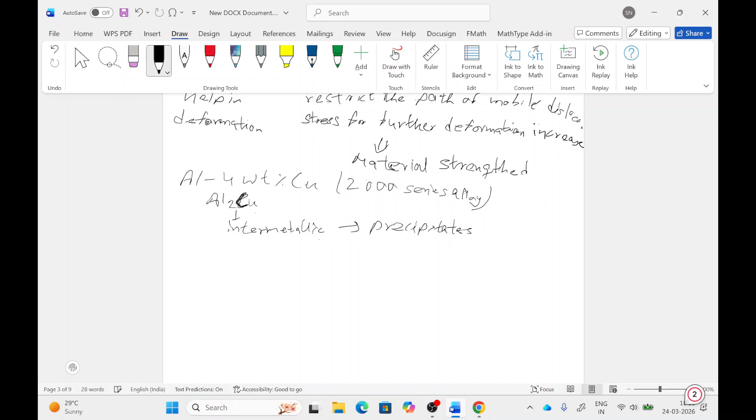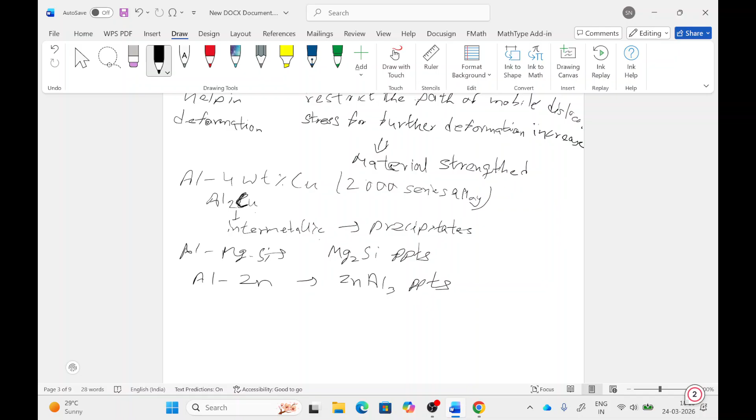Similarly, for the aluminum magnesium alloy and aluminum magnesium silicon alloy, there are Mg2Si intermetallic precipitates. With aluminum zinc also they form ZnAl3 precipitates. So intermetallics are called precipitates, and if oxides and carbides are forming,

carbides are called dispersoids. So dispersoids and precipitates differ from each other. The dispersoids are like tungsten carbide, molybdenum carbide, vanadium carbide, and Al2O3. When these particles form, they are stable at high temperature.

At high temperature they are stable, so they can still provide dispersion strengthening, meaning they maintain the strength of the material at high temperature. But if we talk about precipitates, they dissolve at high temperature, so their strength is only increased for a specific service temperature regime. So precipitates have a service temperature region where the strength is higher, but dispersoids are stable at high temperature, so they provide more strengthening in the metal.

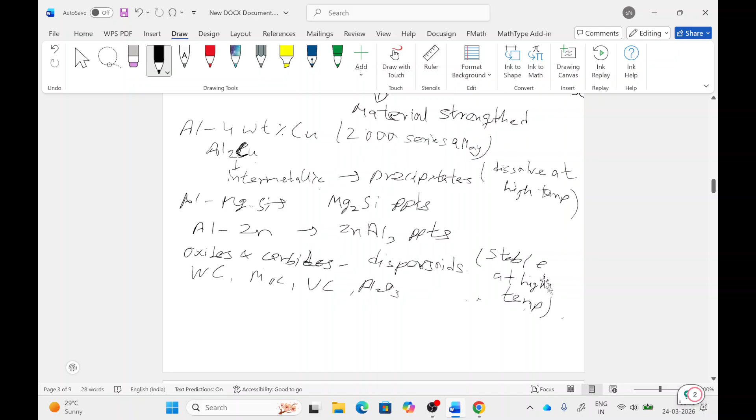So precipitation strengthening occurs. I will explain it here. Precipitation strengthening can be understood by the phase diagram. So if we draw the phase diagram of temperature versus weight percent of copper,

this is the solidus line, this is the liquidus line. Here it is liquid, here it is liquid plus solid, and here it is solid.

We can see that at this point the concentration is let's say C1. If we move along this line, with decreasing temperature, if we mark a point, we can see the concentration of copper is also decreasing in the aluminum. This is the

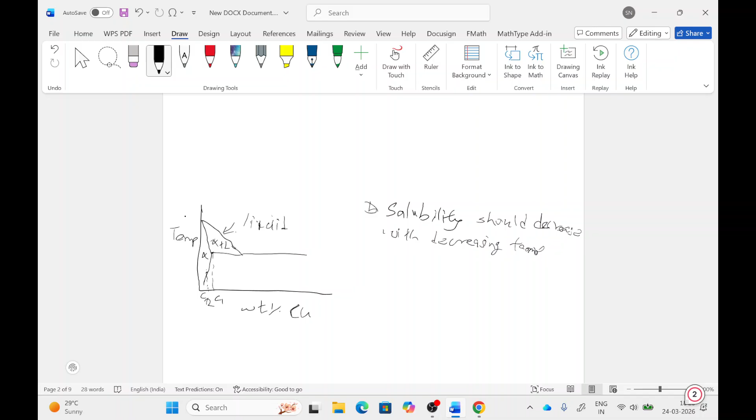In this aluminum copper system, generally the precipitates are formed using a specific method. First, we solutionize our alloy to a temperature. This is 660 degrees Celsius, and this is around 500 to 400. Generally, we heat the material to form a single solid solution where the concentration of copper is higher, let's say at T1.

So we heat the material first, heating to T1, to make a single solid solution, meaning the copper and aluminum — all copper atoms are solutionized in the aluminum matrix.

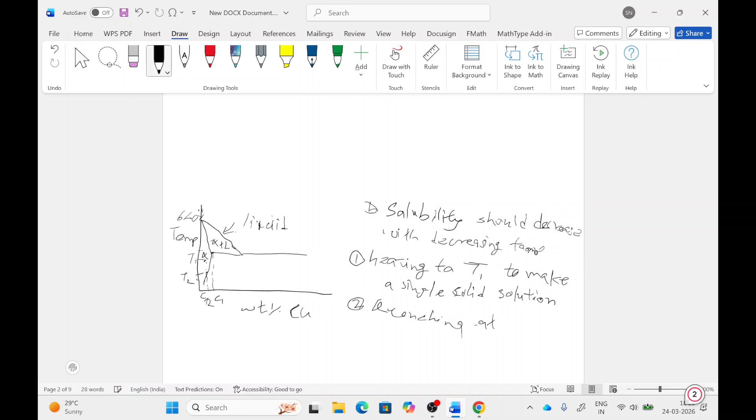So first is the heating, second we quench the sample to room temperature or a lower temperature, let's say T2 — quenching at low temperature. When we quench this alloy, all the copper will remain in the aluminum matrix, meaning quenching is rapid cooling.

In slow cooling, the copper will segregate from the aluminum matrix, but when we do quenching, there is rapid cooling, which helps in keeping the copper atoms in the aluminum matrix. So that solid solution is called a supersaturated solid solution.

After that, if we heat the sample to a slightly higher temperature than T2, heating at a very low temperature, it can be at 100 to 150 degrees Celsius or room temperature. Depending on the temperature given, with time it remains a supersaturated solution.

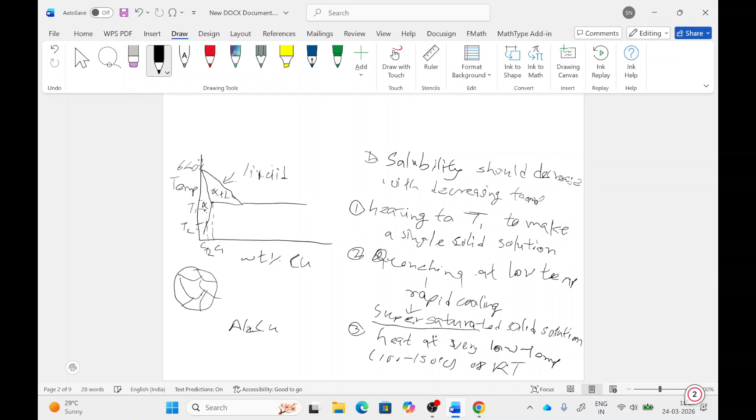When we keep the material for a long period at low temperature or room temperature, small precipitate particles will form in the grains and at the grain boundary also. These tiny particles form with time in the aluminum copper system, and they interact with dislocations, increasing the strength of the material.

Al2Cu precipitate, and the white space is the alpha solid solution with a decreased amount of copper.

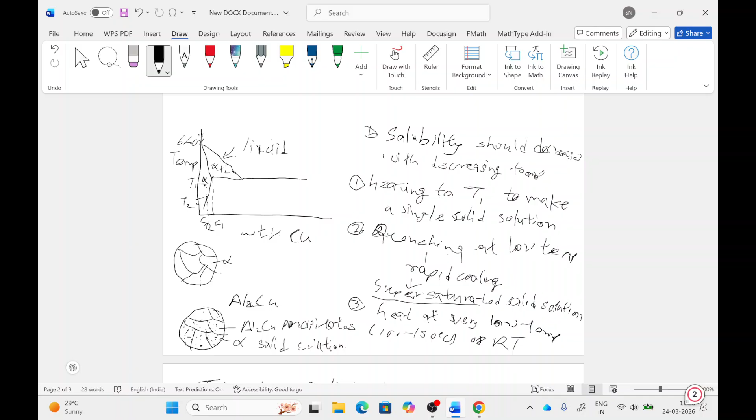So there is one phenomena also. With increasing the precipitate size, the strengthening mechanism also differs. The small precipitate can be sheared or cut by dislocations.

So in this condition, when precipitates are small and dislocation can cut them easily, the strength is directly proportional to square root of the precipitate size.

If precipitates increase in size with time, the large precipitates become strong, so the dislocation cannot cut those large precipitates. Then the dislocations bow around the precipitate and then surpass it. So in that condition the shear stress will be proportional to inverse of the precipitate size.

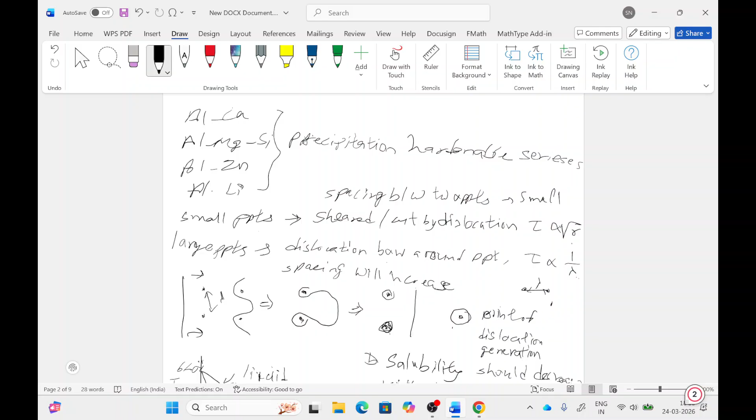So these, and one more thing, aluminum and copper - these are the precipitation hardenable series. And the remaining series, like aluminum magnesium, aluminum manganese, they are strain hardenable, like simple pure aluminum, aluminum manganese - these are strain hardened.

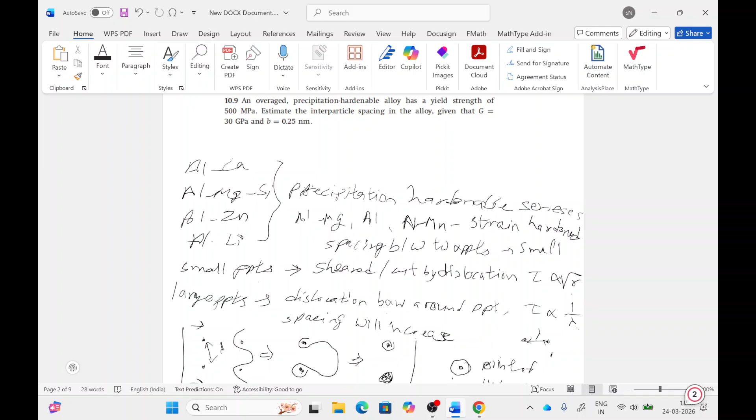So depending on the material or alloy, the strengthening mechanism will differ. In small precipitates, it is size of the precipitate, R. So with small precipitate, the particle size dominates, while in the large precipitates, the distance between precipitate dominates in strengthening.

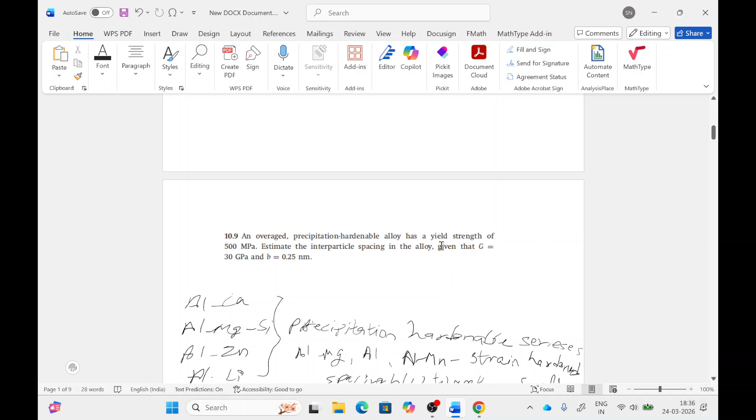So we'll discuss the questions. In this question, we have asked: consider a precipitation strengthened aluminum alloy. After an appropriate heat treatment, the microstructure of the alloy consists of precipitates with a mean spacing of 0.2 micron. Compute the shear stress required for bowing of dislocation in this material.

So we have given spacing between precipitates. Lambda is 0.2 micrometer, and it is aluminum alloy. So we have asked to calculate the shear stress. So shear stress can be written as GB by lambda.

So the shear modulus for aluminum alloy is 72 GPa, and Burgers vector is generally 0.286 nanometer. So when we put these values in, we get G is 72 into 10 raised to power 9 Pascal, into 0.286 into 10 raised to power minus 9, divided by lambda which is 0.2 into 10 raised to power minus 6 meter.

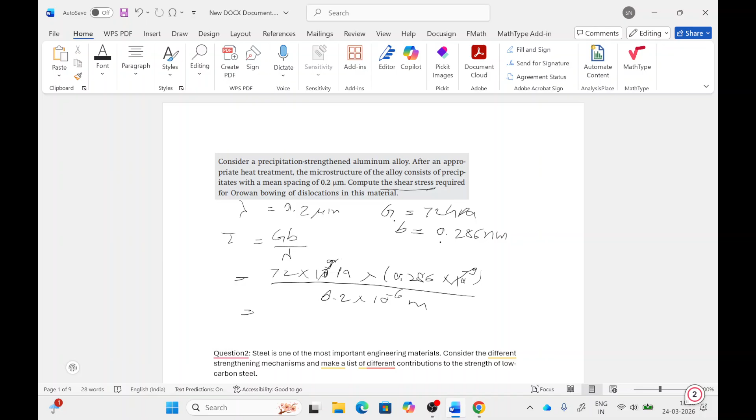So this will get cancelled out, and that will give... sorry, here G is the shear modulus, not the elastic modulus. So G is shear modulus.

So for aluminum, it is 30 GPa, or 27 also there. So elastic modulus is 72 GPa for aluminum and shear modulus is 30 GPa. So when we put 30 here, that will result in 42.42 into 10 raised to power 6 Pascal, that will be 42.42 megapascal.

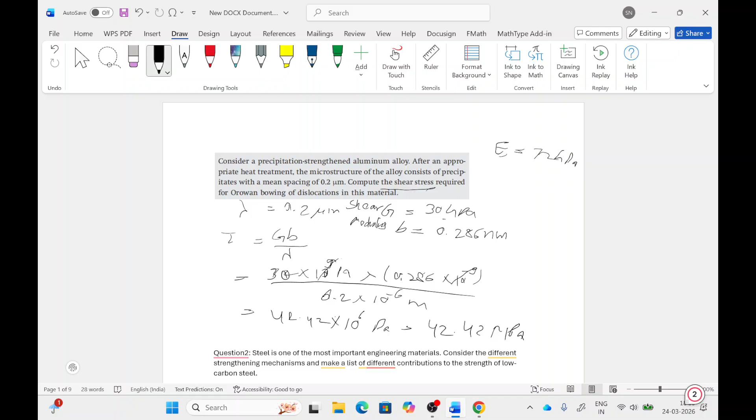Next question we will solve. It is a theory-based question. We discussed that different materials will have different types of strengthening mechanism, so in steel also we have a strengthening mechanism which results in increasing the strength. Steel is one of the most important engineering materials. Consider the different strengthening mechanisms and make a list of different contributions to the strength of low carbon steel.

So in the low carbon steel, it is iron and carbon, but some other trace elements can also be there, like magnesium, silicon, tungsten, chromium, vanadium, in very small amounts. These all can form carbides with carbon, and with contact with oxygen they can form oxides also.

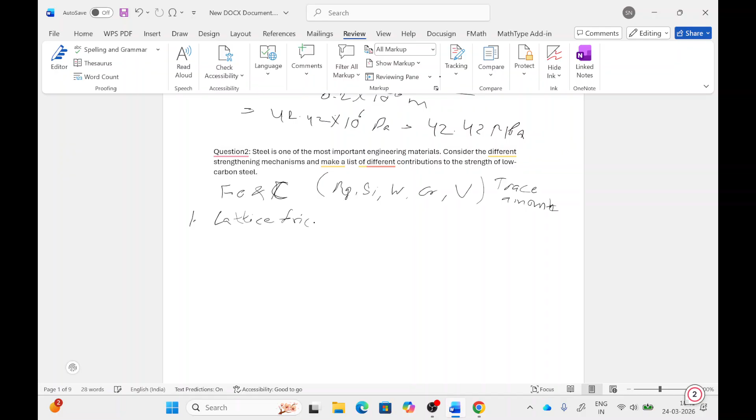So there are dispersoids. So the first contribution in steel is the lattice friction stress. This is the compulsory strengthening in any material if we don't have any dislocation or any other feature - lattice friction will always be there. So we can say it is Peierls-Nabarro stress. Second strengthening is the solid solution strengthening.

It is written as sigma equals k root C, where C is the concentration of solute, meaning the carbon percentage, and K is some constant. So depending on the carbon concentration and other elements that influence strengthening by their presence, this also results in solid solution strengthening.

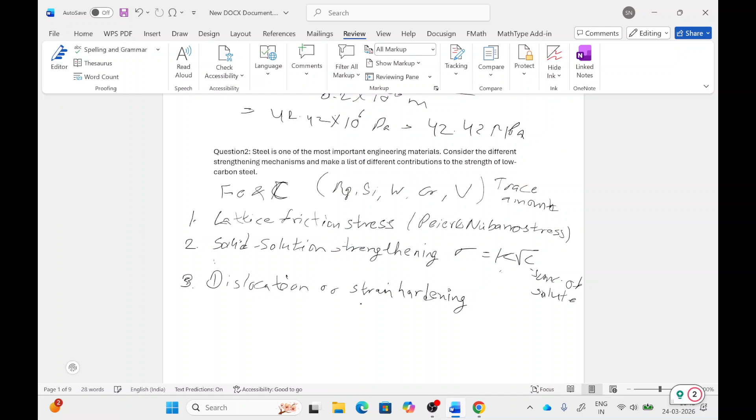Third point is dislocation or strain hardening. If we provide some deformation to the steel, that deformation increases the dislocation density, and that dislocation density increases the strength of the material. The stress is given as sigma proportional to alpha GB square root of rho, where alpha is some constant, G is shear modulus, B is Burgers vector, and rho is the dislocation density.

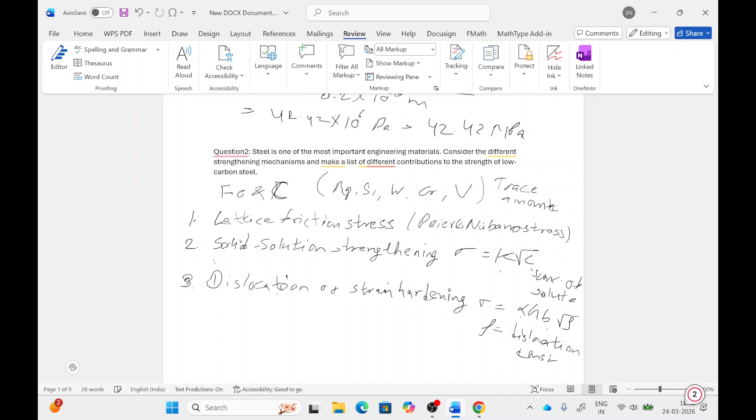Next is grain size strengthening. The grain boundaries also restrict the dislocation path, which results in strengthening. It is given as sigma equals K by root D, where D is the grain size. With increasing grain size, the strengthening will be low, and with a finer grain size, it will result in more strength.

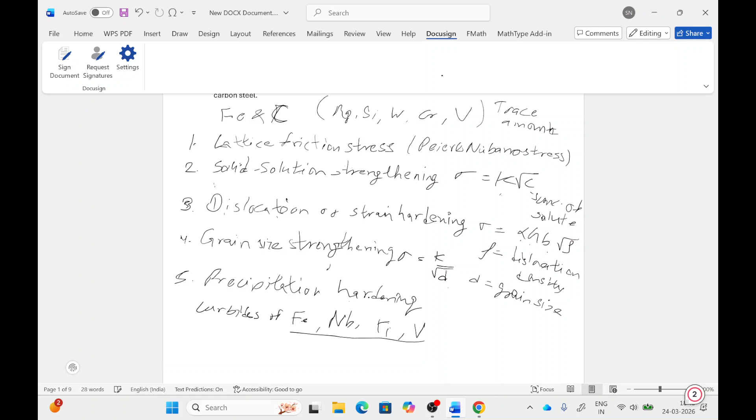Fifth contribution is from precipitation hardening. Precipitation hardening in a steel results from the carbides of iron, niobium, titanium, and vanadium. The carbides forming from these elements result in precipitation hardening or dispersion hardening also.

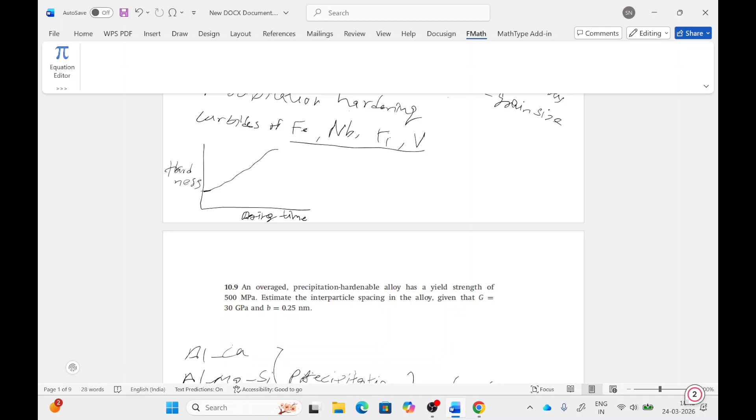Next question is on overaging in precipitation hardening. Overaging means if we draw a curve between hardness and aging time, we have some small amount of hardness in the material initially. The hardness increases with aging time and achieves a maximum hardness at a certain aging time, called the peak aged condition. In the peak aged condition, the hardness is maximum. The stage before this is called underaged, and the stage after peak aging is called overaging.

In this question, we are asked: an overaged precipitation hardenable alloy has a yield strength of 500 MPa. Estimate the interparticle spacing in the alloy, given shear modulus 30 GPa and Burgers vector 0.25 nanometer. So we have yield strength of 500 MPa, meaning the normal strength, and the shear strength of this alloy will be half of the yield strength.

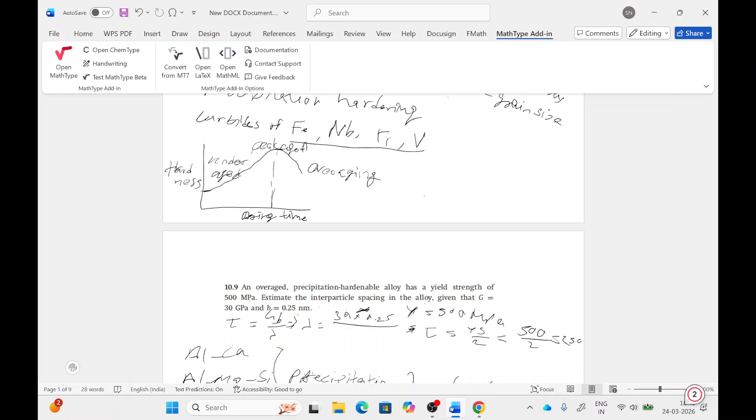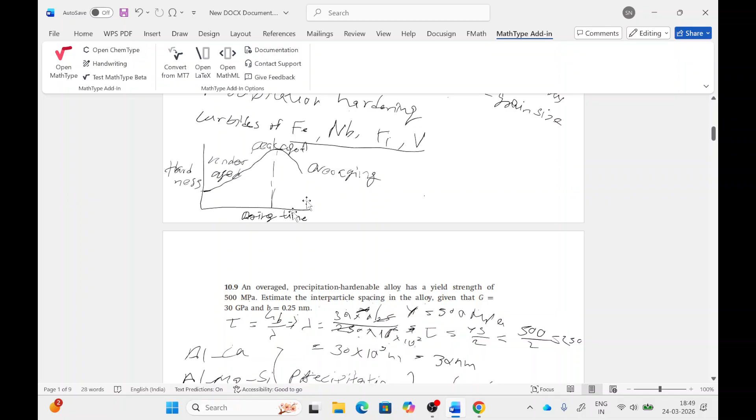Okay. Now, a numerical on the Peierls stress and the energy curve. Peierls Nabarro stress is the lattice friction stress.

We have an atomic arrangement like this. When the top layer of atoms moves in this direction, the atom has to move to a new position. The energy curve shows energy increasing as it comes to this point, reaching a maximum when the atom moves to this position, then decreasing again when it reaches the next stable position. When it comes here, the position is the same as previously, with no stress.

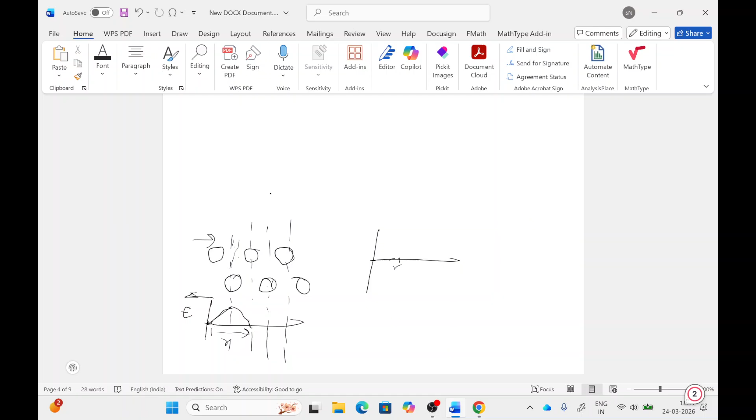When we plot force for this same range, this would be R by 2, and this is R. So the energy curve gets divided into four parts. At this quarter position, the force is maximum, and it decreases as it reaches this point, becoming very low at this position, and the force becomes zero again when it reaches this point.

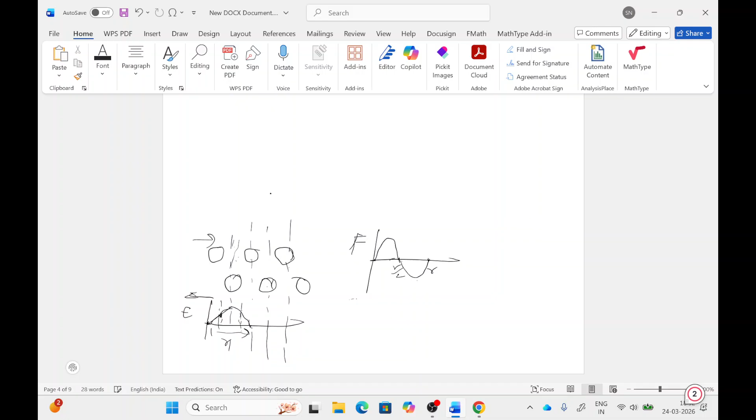So we can write force as shear stress tau, directly proportional to sine of this r. If we calculate it, there's some derivation involved, and the energy curve follows this pattern. This gives the Peierls stress formula: tau Pn equals 2G divided by 1 minus nu, times exponential of minus 2 pi w divided by b.

So G is shear modulus, nu is Poisson's ratio, b is Burgers vector, and W is the width of the dislocation.

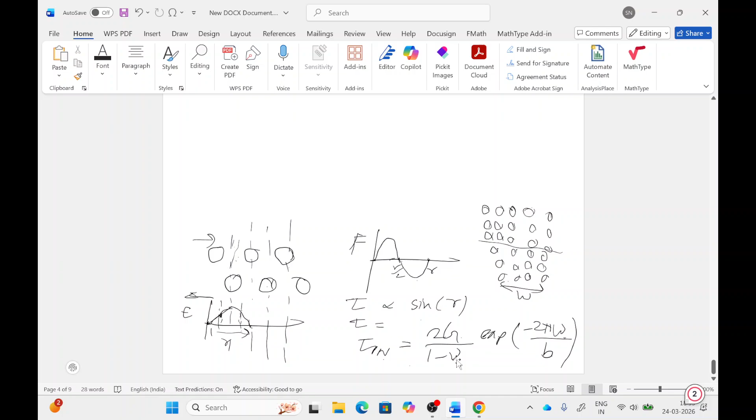Okay, so we'll discuss the assignment questions now.

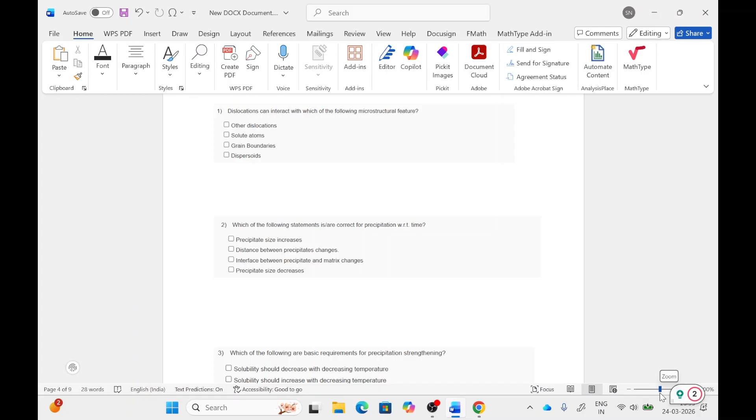First question asks: dislocation can interact with which of the following microstructural features? We discussed in the strengthening mechanism which features are responsible for dislocation interaction. All of the above, yes.

Next question: which of the following statements are correct for precipitation with respect to time? So options 1 and 2 - precipitate size increases and distance between precipitates changes.

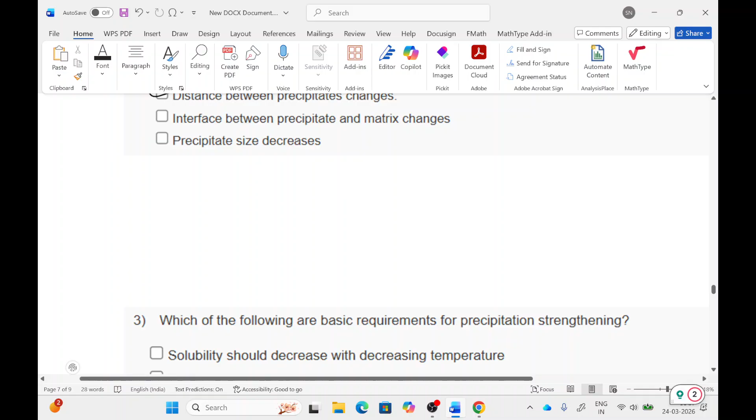Third question is, which of the following are basic requirements for precipitation strengthening? We had discussed in the phase diagram that solubility decreases when we decrease the temperature. So the first option is correct - solubility should decrease with decreasing temperature - and the second is wrong.

Formation of supersaturated solid solution - this is also required. And presence of a single phase region at high temperature - this is also correct.

Okay, next question - fourth question is,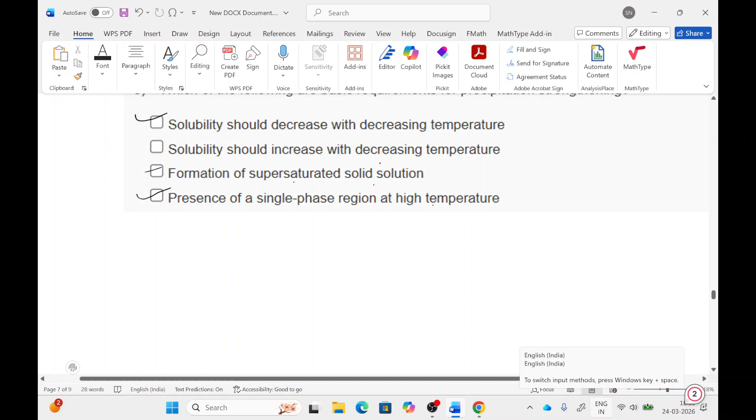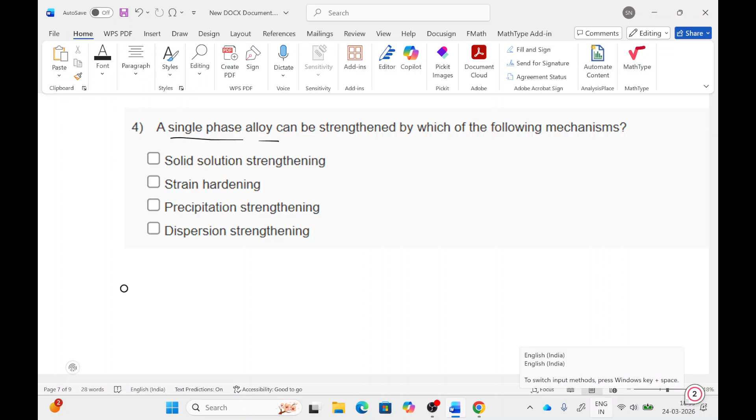a single phase alloy can be strengthened by which of the following mechanisms? Single phase alloy means there will be no precipitate or dispersoids. So other than dispersoid and precipitation strengthening, what can be the mechanism? There are two options remaining: solid solution strengthening and strain hardening.

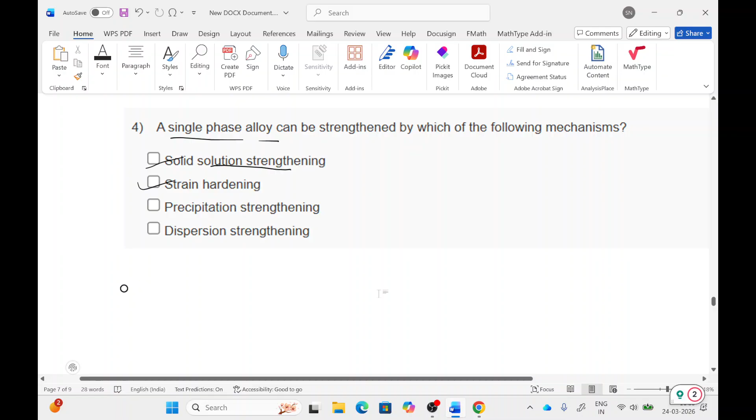Okay, next question is: which of the following conditions favor dislocation cutting of precipitate? So when dislocation cuts the precipitates - yeah, one more thing I have to tell.

With increasing size of the precipitate, the interface also changes. For small particles, the interface between the aluminum matrix and precipitate is coherent. Coherent means atom to atom matching.

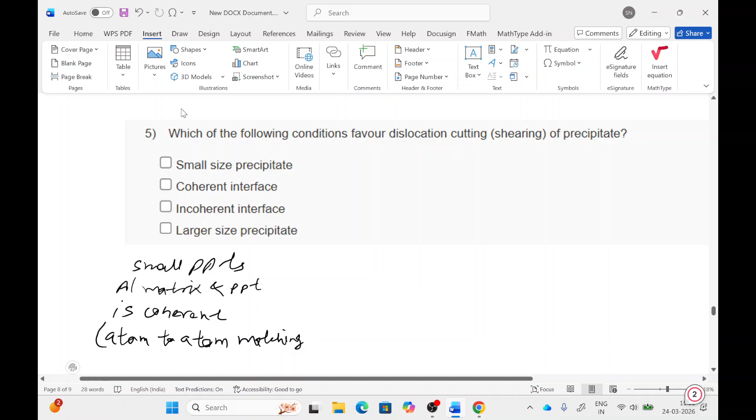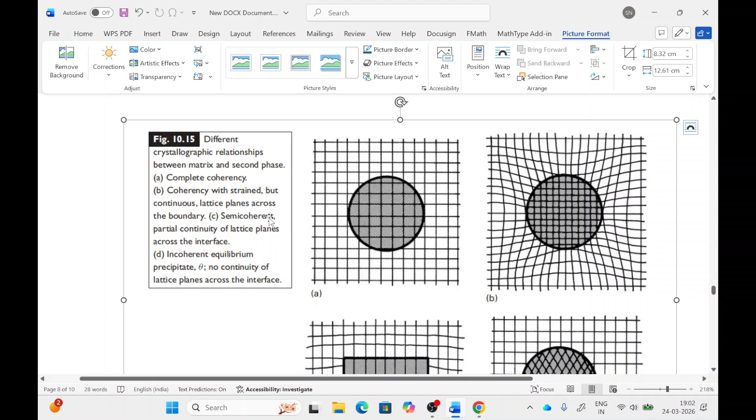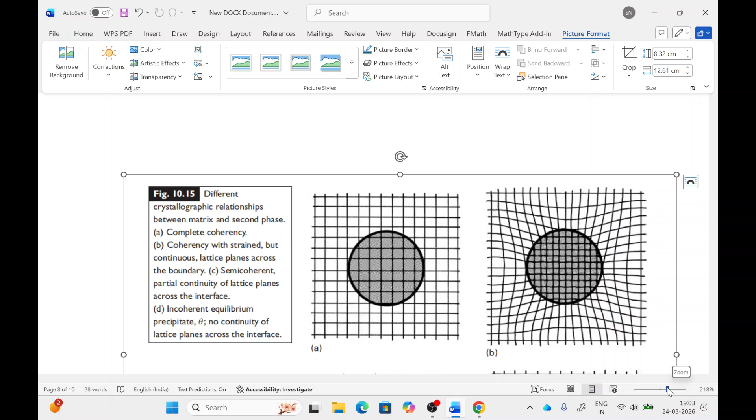I will show a picture. Can you see this picture? I will zoom out a little bit.

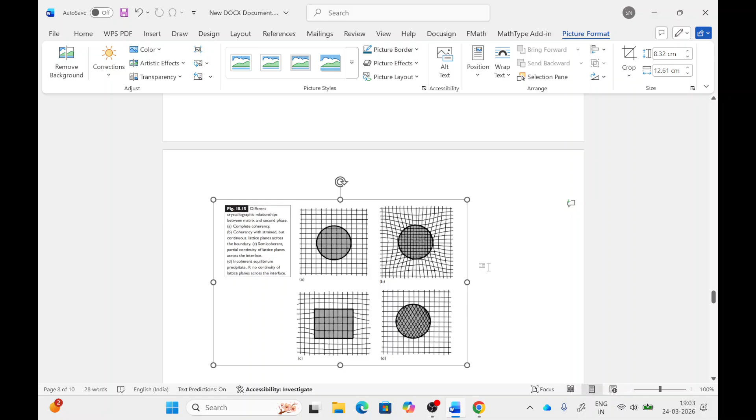In this picture, figure A shows complete lattice matching, meaning the same crystal structure can be seen. The small sphere is the precipitate, and outside of this is the matrix. We can see that the atoms are aligned one by one. This situation we can call complete coherency, so there will be no strain between atoms in the first figure.

In the second figure, the atomic spacing between two atoms is decreased as compared to the aluminum matrix. So in this, the atoms are still matching but with some strain. The second figure represents coherency with strained but continuous lattice planes across the boundary, meaning lattice planes are matching but with strain.

Next, the third type of situation shows atomic spacing is completely different, and the atoms match for some planes while other planes are not matching between the matrix and the precipitate. So there is still some atomic matching - this third figure we can see as a semi-coherent interface, with partial continuity of lattice planes across the interface.

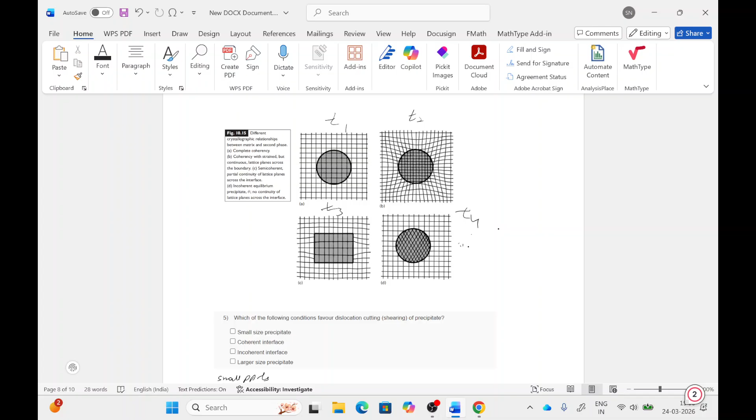Now we can solve this fifth question, which asks which condition favors dislocation cutting of precipitate. Dislocation cutting will only happen when a coherent interface is present between the precipitate and the aluminum matrix, and when the precipitate size is small. So the first and second options will be correct for this. Is it clear?

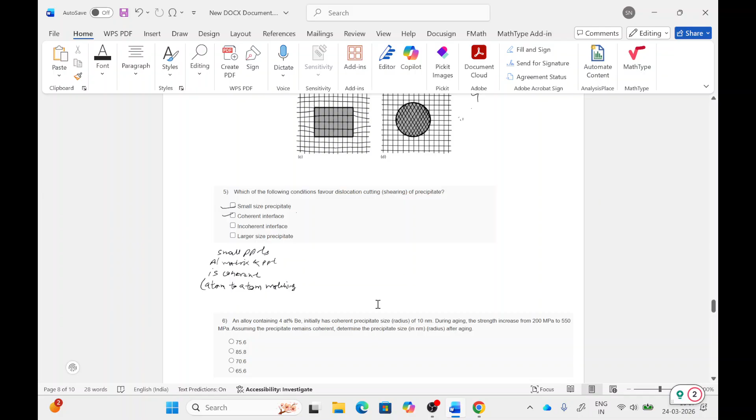Okay, we'll go to the next question. In the sixth question, we have: an alloy containing 4 atomic percent of beryllium initially has a coherent precipitate size of 10 nanometers. During aging, the strength increases from 200 MPa to 550 MPa. Assuming the precipitate remains coherent, determine the precipitate size after aging.

Since the precipitates are coherent, the dislocation cutting or shearing mechanism will dominate in this region. During shearing or cutting of the precipitate, the shear stress is directly proportional to the square root of the precipitate size R.

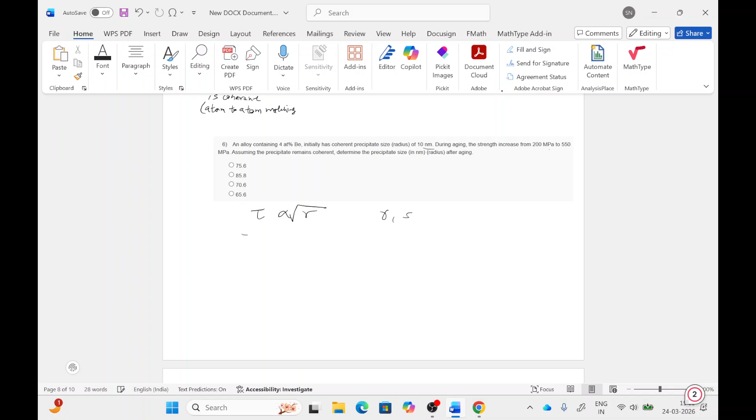So we need to solve for the precipitate size after aging. Initial radius R1 is 10 nanometers, tau 1 is 200, R2 we have to find, and tau 2 is 550. So we can take a ratio: tau 2 by tau 1 will be root R2 by root R1.

So we have to find the radius. R2 will be tau 2 by tau 1, squared, into R1. So that will be 550 by 200, squared, into 10 nanometers. That equals around 75.6 nanometers. So the first option is correct. You have to solve this by taking the ratio and then equating.

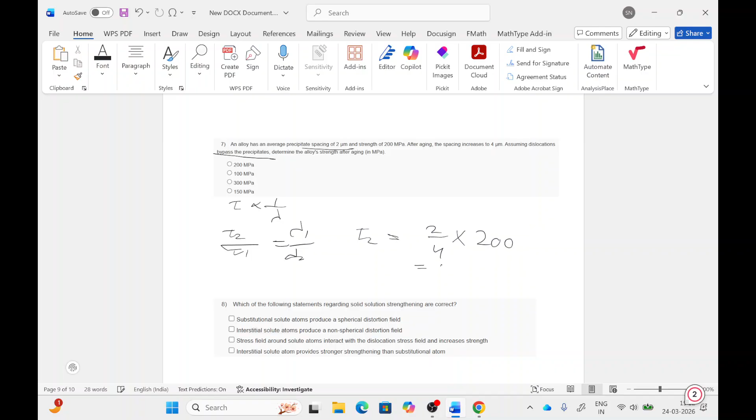In this question we have given precipitate spacing and dislocations are bypassing the precipitates, so shear stress is inversely proportional to spacing. We need to find the alloy strength after aging. So tau 2 by tau 1 will give lambda 1 by lambda 2. So tau 2 can be written as lambda 1, which is 2 by 4, into 200.

That will result in 100 MPa. So option B is correct for this.

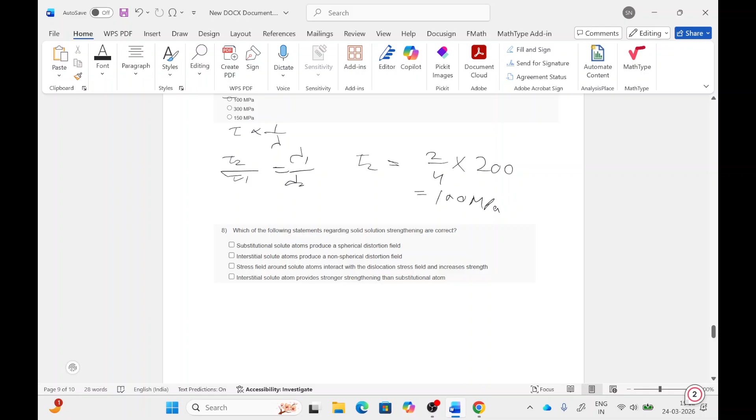Next, eighth question: which of the following statements regarding solid solution strengthening are correct? In solid solution strengthening, there are two types of solute atoms: substitutional and interstitial. The substitutional atom has a spherical distortion field around it that interacts with dislocations, and the interstitial solute atom has a non-spherical distortion field. So the first and second options are correct.

Next, the stress field around the solute atom interacts with the dislocation stress field and increases strength, so the third option is also correct. This interaction between the stress field around the dislocation and the solute atom results in strengthening. The fourth option says interstitial solute atoms provide stronger strengthening than substitutional atoms, which is also correct—interstitial strengthening will be higher than substitutional.

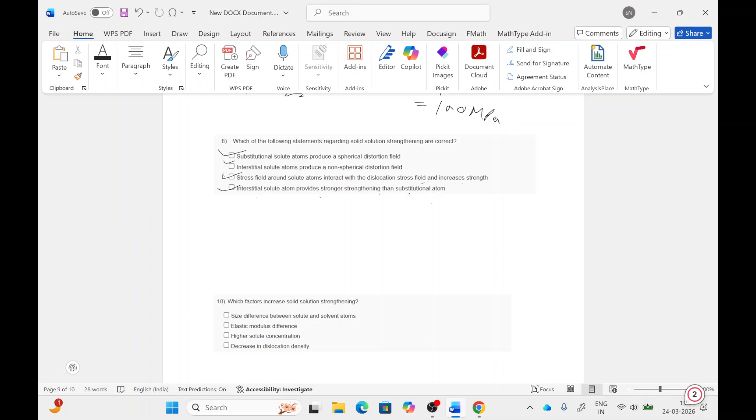Next question: which factor increases solid solution strengthening? Solid solution strengthening depends on the concentration of solute atoms, and it also depends on the size difference. In this question, size difference results in solid solution strengthening, elastic modulus difference, and high solute concentration are all relevant factors.

So this decreases—no, only the first three options are correct. The fourth option is wrong.

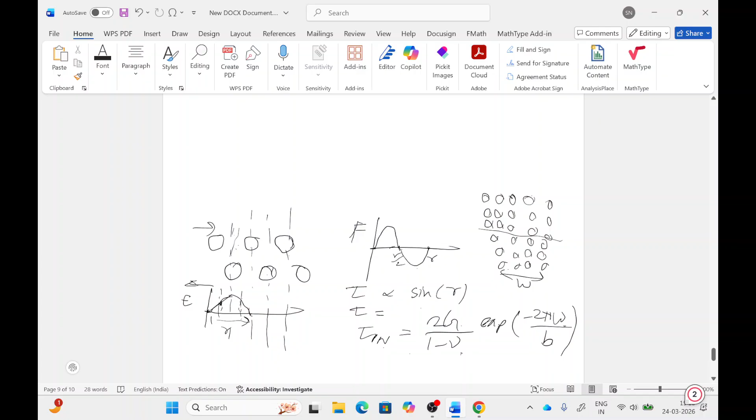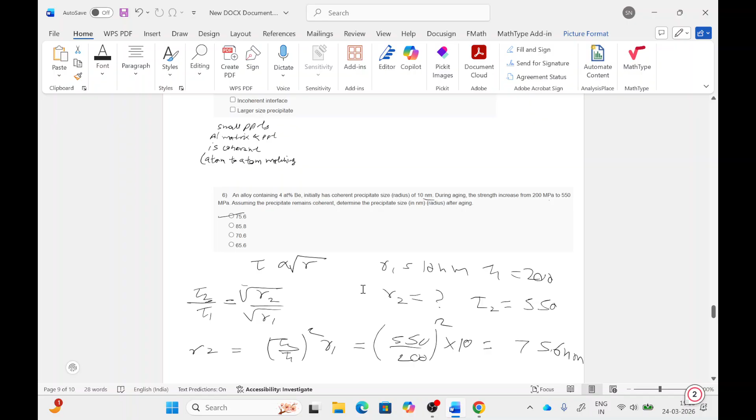So some more questions are there. No, we have solved them. These questions are from the previous assignment, and some questions are the same as the new assignment.

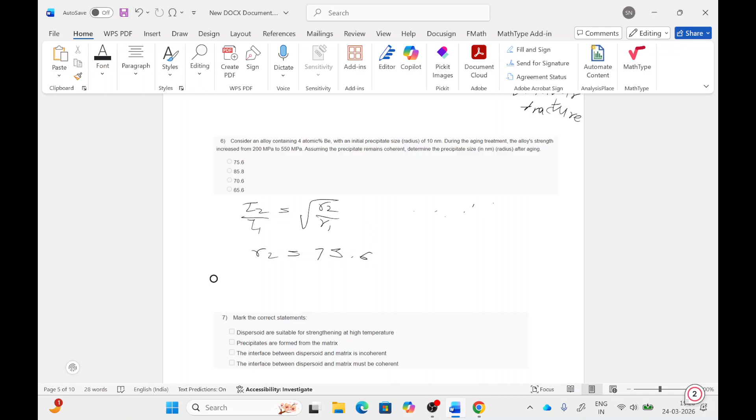Next question: mark the correct statement. The first option says dispersoids are suitable for strengthening at high temperature. This is correct, since dispersoids are stable at high temperature. So the first option is correct.

Precipitates are formed from the matrix. Yes, first we make the supersaturated solid solution, and after aging, precipitates are formed from the matrix.

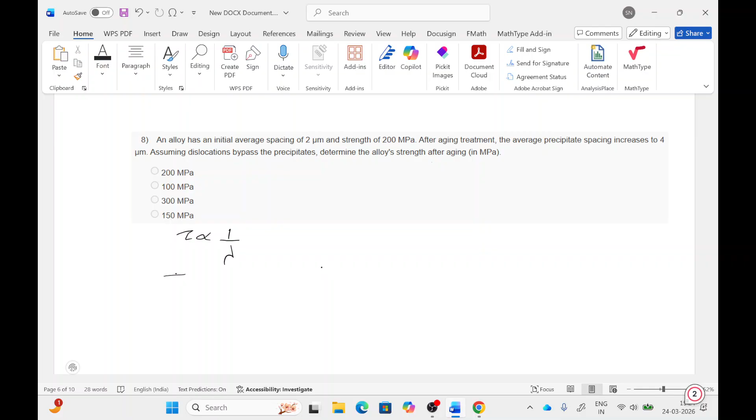The strength is inversely proportional to interparticle spacing. So tau 2 will be lambda 1 by lambda 2 into tau 1. That gives 2 into 200 by 4, which equals 100 MPa. So option B is correct for this.

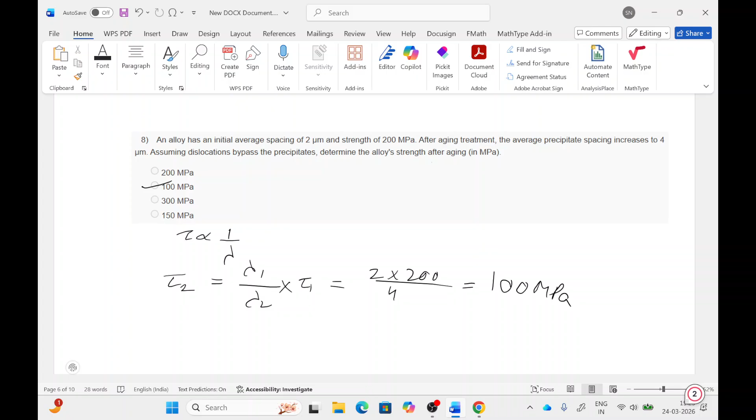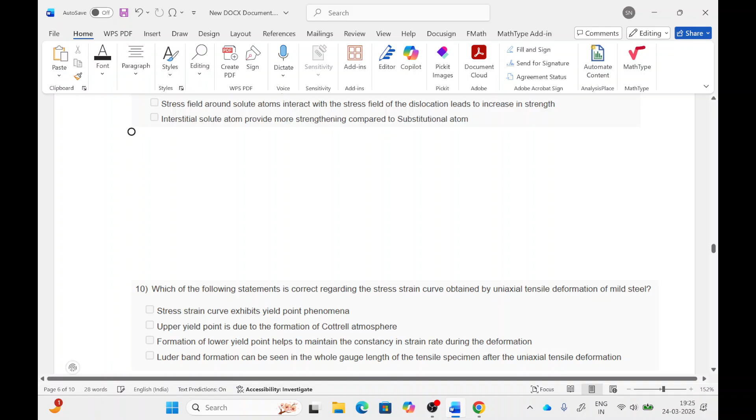The next question asks which of the following statements is correct, regarding substitutional solid solution strengthening.

It is same as the previous questions. Substitutional atom has a spherical distortion field - this is correct. Interstitial has a non-spherical distortion field - this is also correct. Stress field around the solute atom interacts with the stress field of the dislocation, leading to increase in strength - this is correct. Interstitial solute atoms provide more strengthening compared to substitutional atoms - this is also correct.

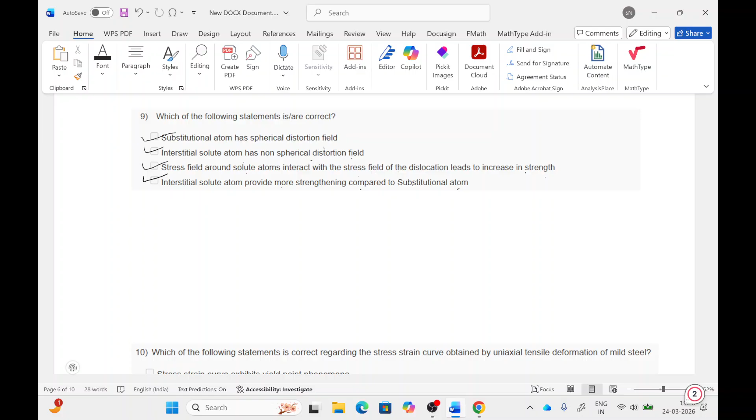Next question asks which statement is correct regarding the stress-strain curve obtained by uniaxial tensile deformation of mild steel. This question is about the strain hardening behavior. In mild steel, the tensile stress curve looks like this: sigma versus epsilon.

In mild steel we get two yield points. The first is called the upper yield point, this is the lower yield point, and this is the tensile strength.

In this, the stress-strain curve exhibits yield point phenomena, meaning we can see the yield point clearly in the steel's tensile stress-strain curve. Upper yield point is due to formation of Cottrell atmosphere, which is solute atoms with dislocation. That condition, forming a Cottrell atmosphere, shows some strength during tensile testing.

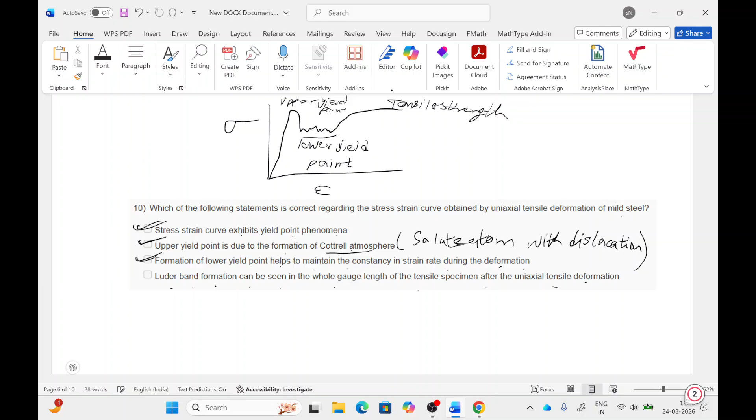Means if we have a dog bone sample - sorry, my system is lagging today - these type of dislocation lines are formed on the tensile specimen of mild steel at the gauge length, and that's why these bands are called Luder bands. So all four options are correct in this.

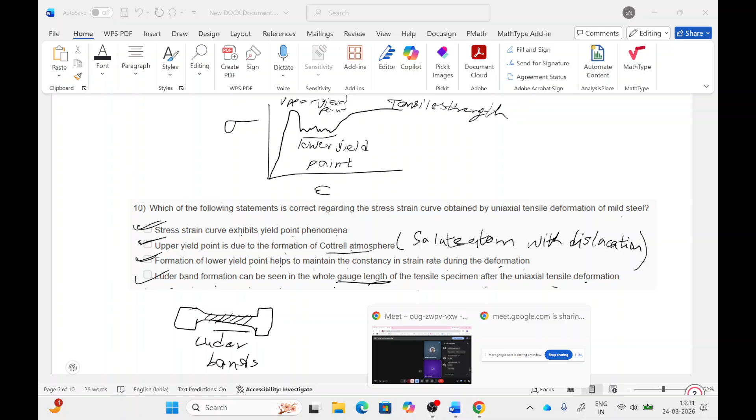The dislocation lines are formed at a 45-degree angle on the tensile specimen gauge length, and these dislocation lines in a group are called Luder bands.